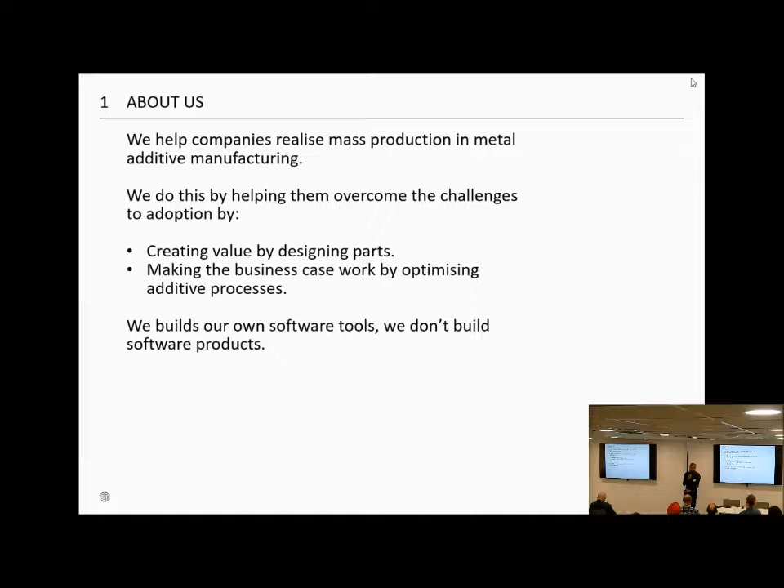So I've got a slide titled 'What is AM?' That's slightly confusing because obviously the talk is titled around 3D printing. 3D printing and all of the associated technologies have a real identity crisis problem, because 3D printing is actually a specific type of additive process - building something up through layers.

We heard about FDM as another type of process, but essentially this captures a whole range of different types of processes for lots of different materials, from plastics all the way to high-end metals. Additive manufacturing is an ASTM agreed term for those technologies entering into the industrial space, qualified because they provide mechanical properties similar to traditional manufacturing. This isn't just creating similar materials - we're actually printing in metals that we can use for all kinds of different applications.

What's really interesting about additive manufacturing fundamentally is that it consolidates processes. Traditionally when we think about how we make something, first we form the material - creating the metal or alloy we want. Then we have a secondary step where we actually create and form the object itself. This is almost how our engineering disciplines exist - you've got your physics, material science, and then your mechanical engineers.

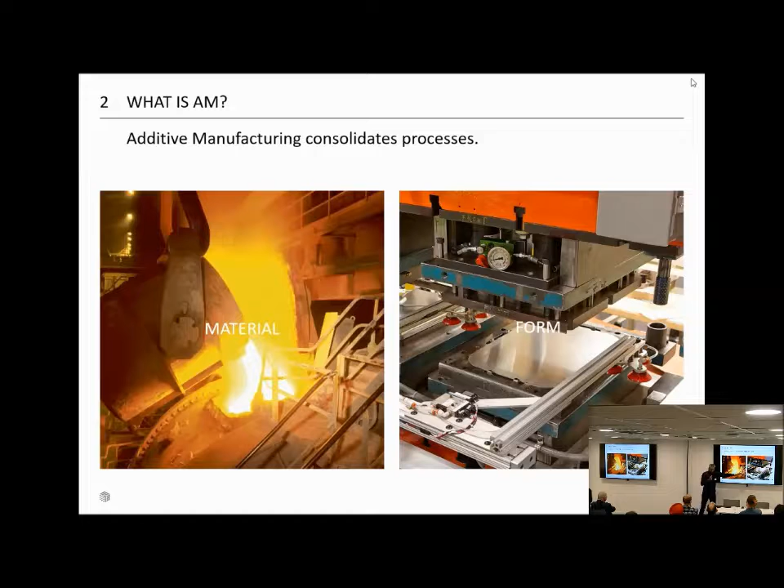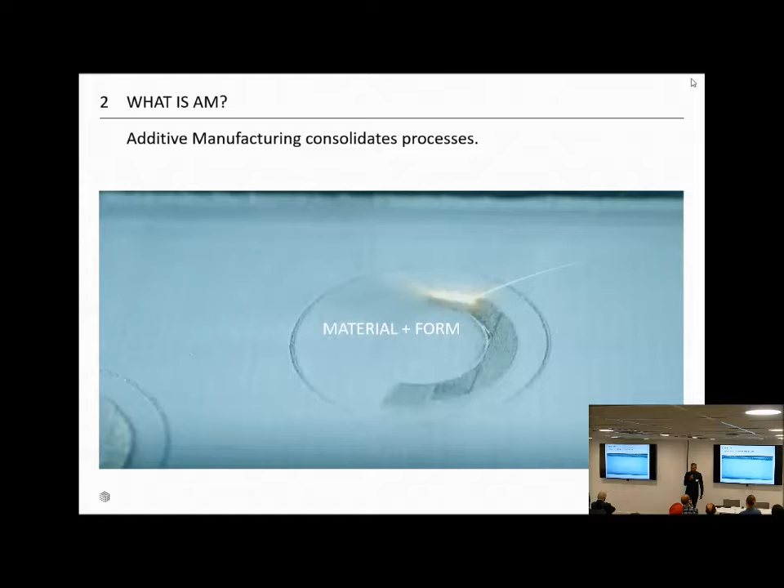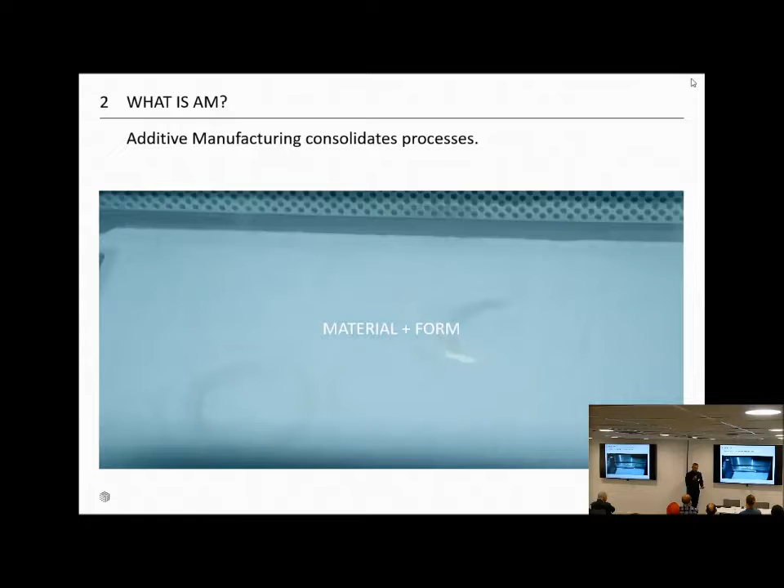So, some examples of parts. The reality is that actually there is a lot of manufacturing happening. It's not really publicly talked about because the main reason is we're talking about very, very high-end industries and markets, and this is usually driven predominantly by economics, in terms of cost.

So aerospace, and this includes both rocket nozzles, as we have here on the left, and also civil aerospace. We are building quite a lot of flight-ready parts on the space side, and there's also a lot of applications in civil aerospace. This is largely driven because in order to build these types of parts consistently, you would usually have to have multiple step processes: first take a billet, machine part of that out, then weld something on, etc. Each of the qualification issues that come across that challenge mean it becomes much easier to use a single step process like additive.

And it's also very similar, actually, in the medical space. This is an acetabular cup, which is part of a hip replacement. Companies like Stryker Orthopedics have produced probably at this point hundreds of thousands of these implants, and they are in use today. Here we have a tremendous opportunity to actually design this porous structure, and the way that structure interacts with the bone can actually be engineered and designed in order to promote bone growth. So there's huge amounts of really exciting opportunities in the medical space around that.

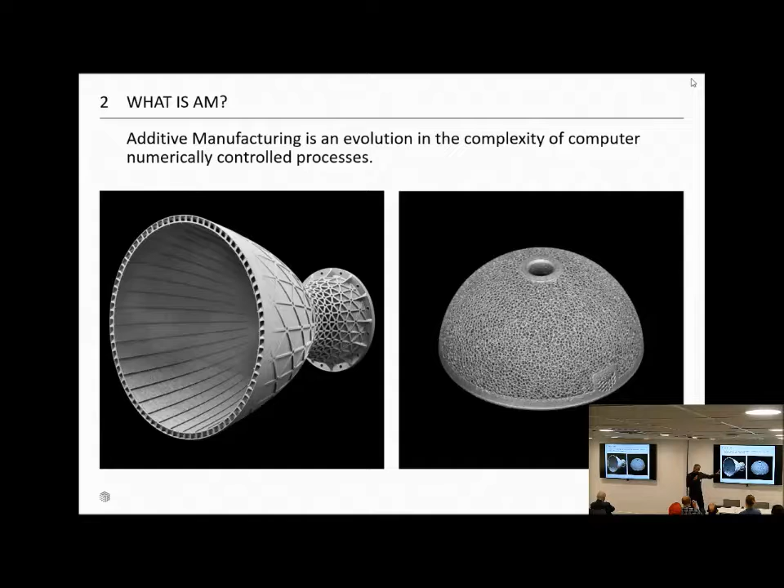But as you'll know from just looking at that, there's a lot there. There's a lot of structure, there's a lot of data. When we think about these systems, our machines are actually considerably smaller than the systems that Greg talked about. So this block on the left is about 250 by 250 in the XY, and then about 300 mil high. It contains in that model around about 20 million individual lattice elements, every single beam here, and we can push those down to the order of about 0.1 millimeters.

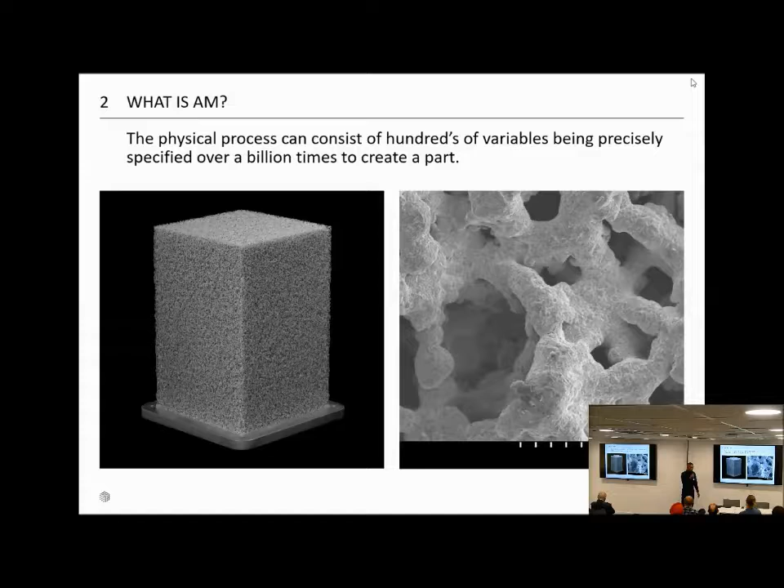So you can already start to understand the challenges from the standpoint of how do I build a geometric representation of this model? More importantly, how do I take that geometric representation from a digital plane and actually manufacture that data? How do I build computational tools to help me deal with the amount of data that we're pushing across? So there's actually this incredible richness in 3D printing and additive manufacturing for the application of really interesting algorithmic approaches to solving that, and that is part of what we do.

But you also need to incorporate a lot of understanding across a whole range of disciplines. There's still a lot of things that are unknown about the way the actual laser powder bed fusion process works, like what actually happens when a laser is fired and hits a bunch of powder, and how does it form that metal. Lawrence Livermore National Laboratory actually went ahead and looked at this with a high-speed camera, and it's definitely a really exciting video to watch as it blows away all of this metal powder as it's focused down on a microscopic level.

Watching the melt fusion interaction and condensation is an incredibly complex process. We're still at a very early stage in understanding that, but we have to bring some of that understanding into our design process in order to understand what works and what isn't going to work in terms of what actually allows you to build a good part.

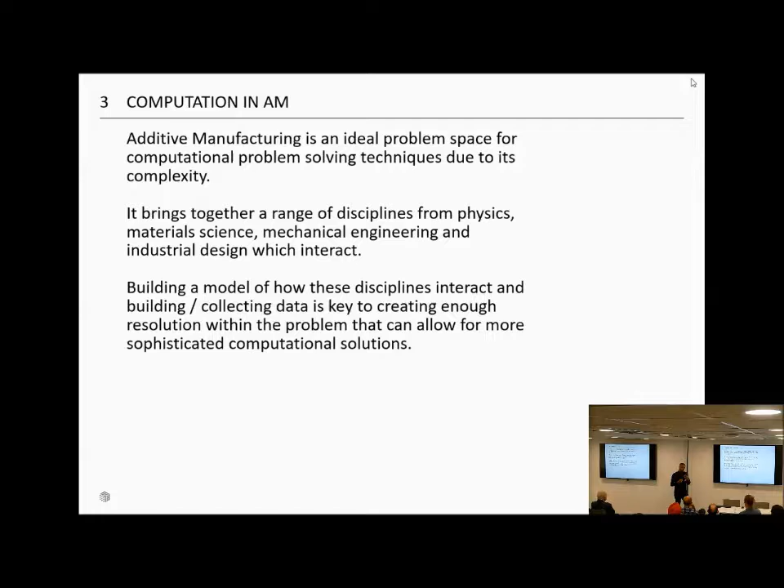So part of what we're doing at this point is, it's a bit too far ahead for us to start applying machine learning or AI to what we're doing. But what we are doing is building the environment for those algorithms. We're building a lot of models and data to help us create environments where we can start to bring more sophisticated algorithmic problem-solving solutions to that space.

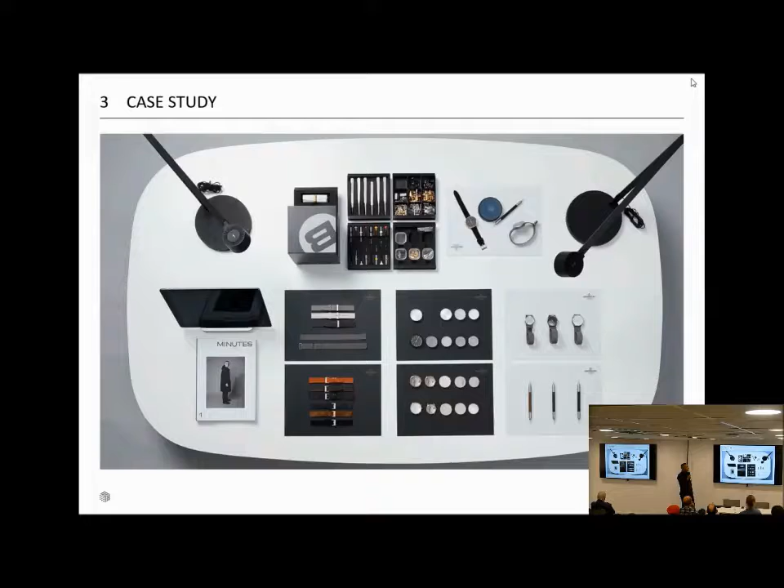I want to give you an example, a case study of a part which I can actually talk about, because 90% of the projects we work on are at a level where you can't get into any detail. But this project involves a couple of things we did with a company called Uniform Wares, a small watch manufacturer here in the UK, but a global retailer selling product across the world. We worked with them on developing a brand new material, and that material is actually in this watch, the watch strap itself.

Working very closely with them, we designed and manufactured a new type of fabric mesh, going through the process of trying to understand what the design potential of that could be, and how the computation side comes into that.

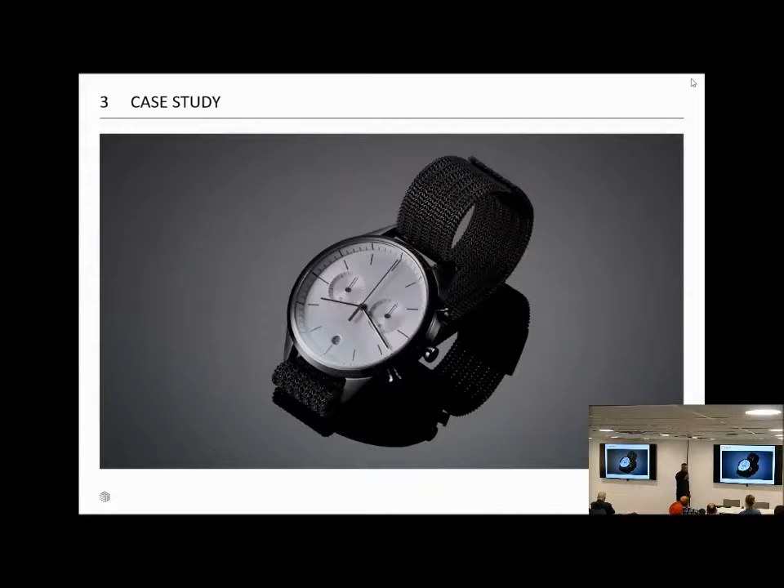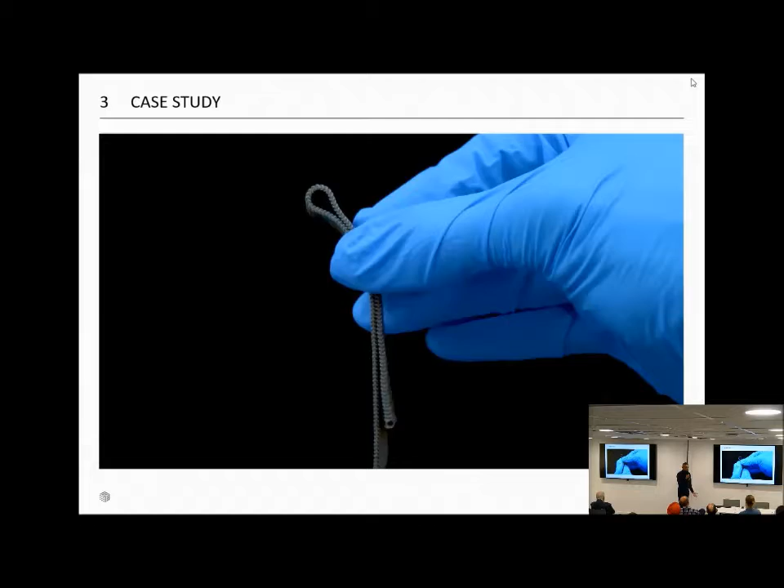One of the things we wanted to do was create a material with asymmetric behavior. As you can see, as I'm folding that fabric structure, I'm getting two completely different bend radiuses. You can start to see how this can have all kinds of different applications, from flexible hinges in consumer electronic devices to heart stents. But this is the kind of level of control we're trying to achieve here.

And to do that requires us to be able to model down into this part with a tremendous amount of detail. It's this kind of fidelity which is where the complexity really starts to lie.

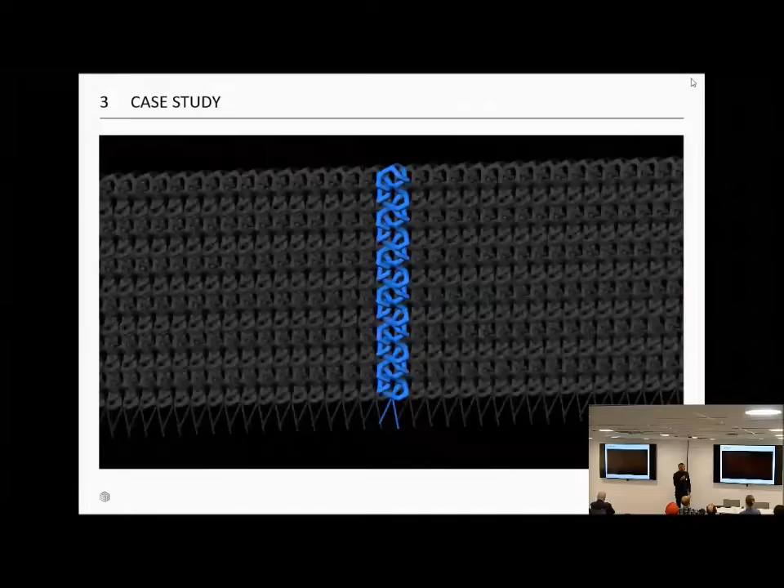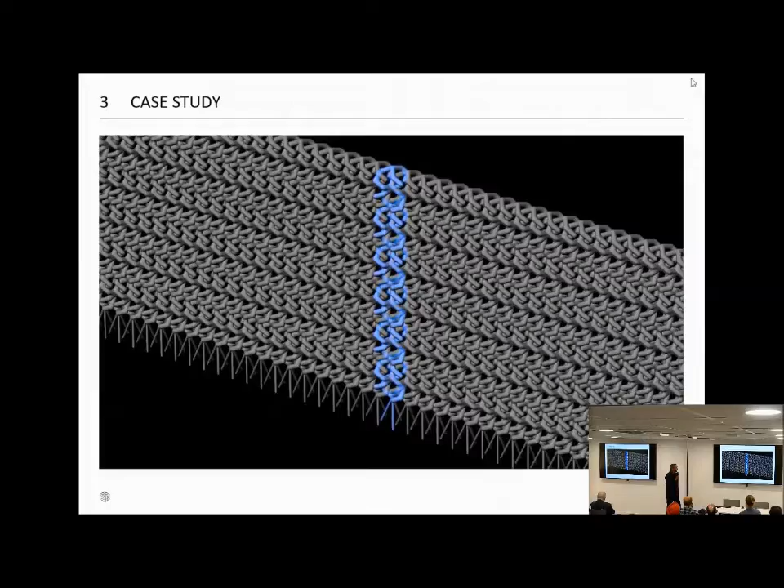In this actual weave itself, unlike normal mesh straps or fabric weaves, these parts are built so there is no weak link. It's a single link which is all intersectionally built. That allows us to provide a very high level of precision in controlling that behavior. Each individual strap contains something like 39,000 individual elements, and we need, from a CAD environment side, the ability to go in and modify every single individual strut.

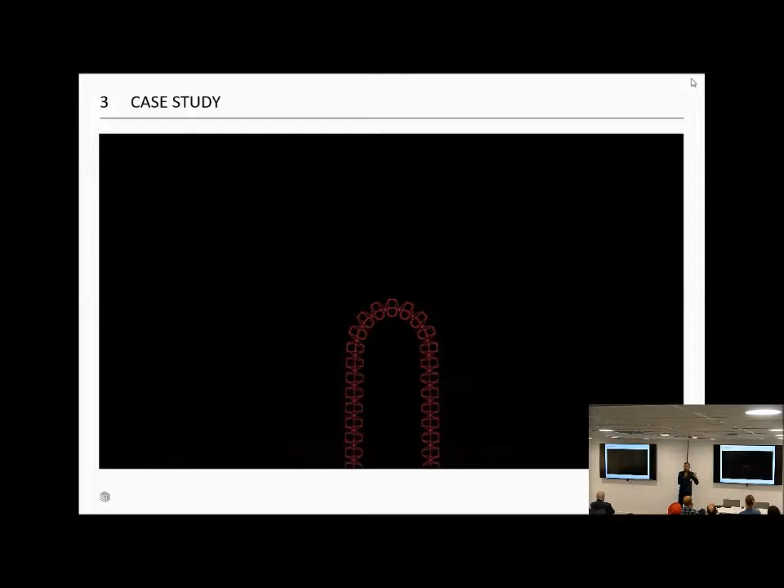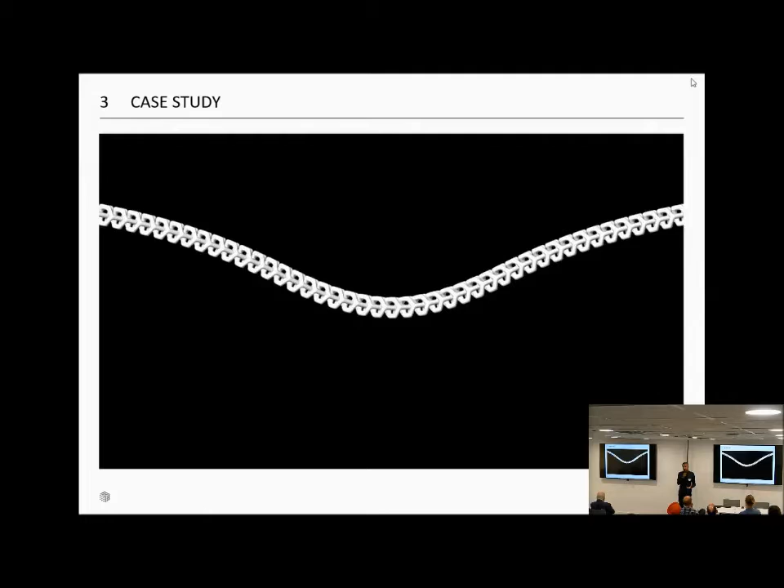Doing that allows us to simulate, for example, how the actual behavior of that structure is going to work. Just by moving a few links around about 50 microns, we start to have the ability to physically engineer exactly how we want that to behave in the real world. And this kind of level of control can then be exercised on an individual link level, which gives us a huge amount of customization, something you would never be able to do with a standard part.

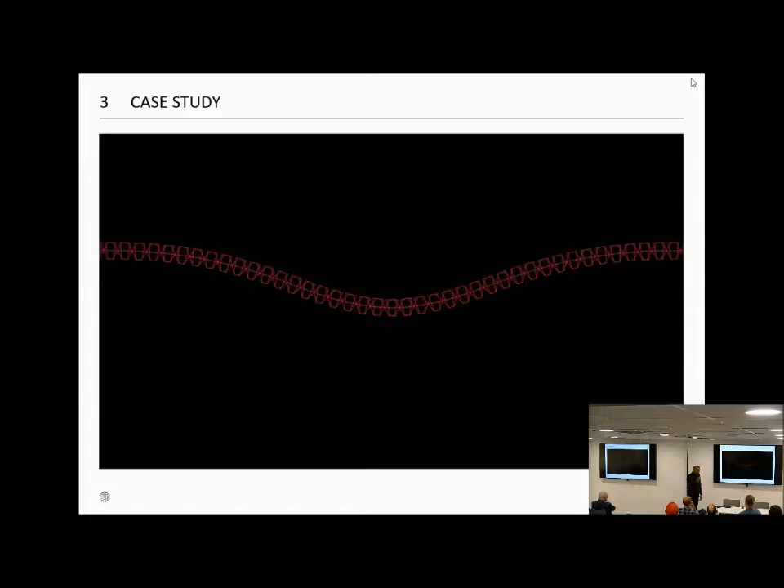Now, when I talk about the amount of detail we're dealing with in each of these parts, it's important to give you context for what I mean by those numbers. In the individual watch straps, and I have an example with me, there are 35 million laser operations per strap. In each operation, I have about 10 to 15 different variables I can control in order to control the way the actual melt pool and the physical process of fusion occurs. And I need to be able to control that.

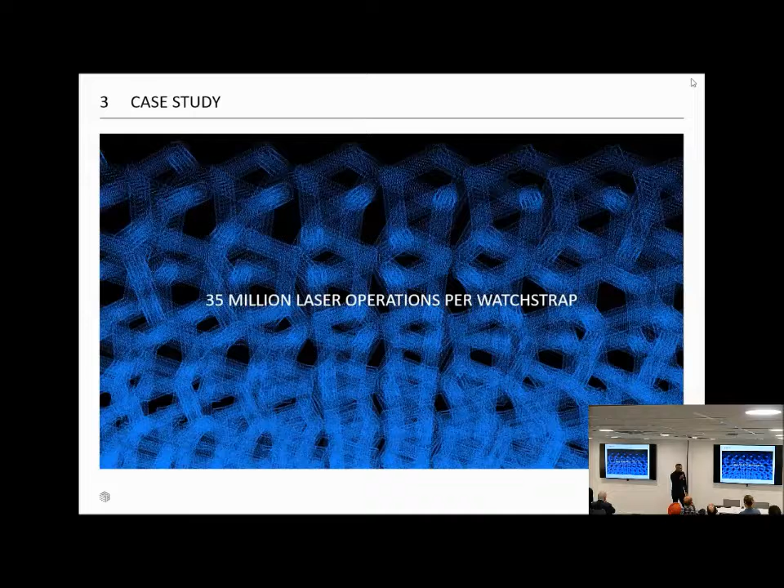At the moment, this is happening at around 10,000 laser operations per second. The laser is moving in increments of up to 20 microns, traveling at speeds of around 2 to 3 meters per second. And we need ways of being able to manage and control that data, and be able to individually go into each operation and manipulate it as required from a design standpoint.

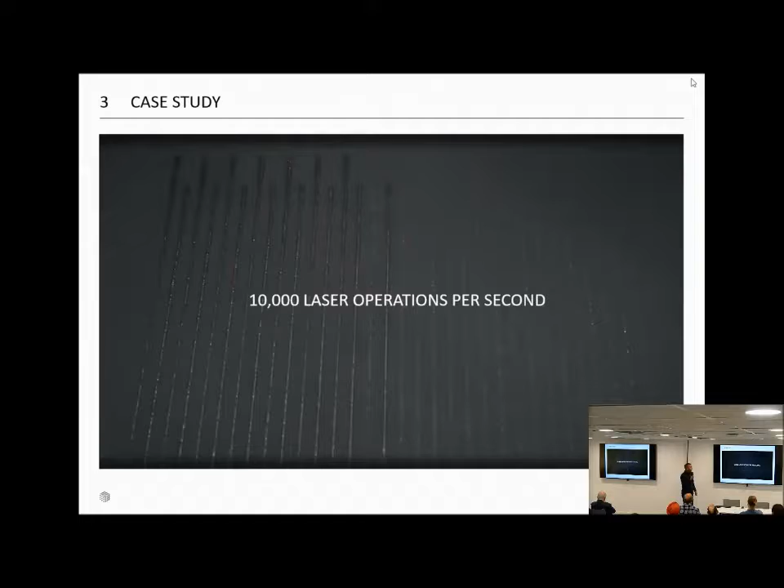So what we've done is built a lot of additional control and software levels of control in order to really be able to dig into that process and actually be able to manipulate and bring that level of opportunity to the table. And that is something I think which is a big component of where the future really sits with a lot of this technology.

We're seeing a huge amount of improvement in the systems themselves. Laser powder bed is probably the most predominant technology that exists today. It's industrially used by companies such as GE, as I mentioned before, Stryker Orthopedic, and a whole range of aerospace customers as well. But we are seeing a whole new generation of systems coming out, and with them comes improvements to material quality, surface quality, and also productivity in these systems.

What we're tending to find, and what's really interesting, is that computation has become this almost universal language for us. So when you're working with designers who are typically drawing on a sheet of paper, how do you bring computation as a language into something which can work as flexibly with their requirement to represent something, but then can also be transformed into something with a huge amount of high level of specificity.

And then being able to move between that translation of data. How do you manage that data? These are all really complex and interesting questions, because we're not moving from someone providing a drawing to a shop, which then machines it, and then someone polishes that at the end. There's actually traceability in that data and how it's managed, and it really does have a really interesting position in also fundamentally changing not just physical manufacturing, but changing all of the engineering disciplines as a fundamental aspect of it.

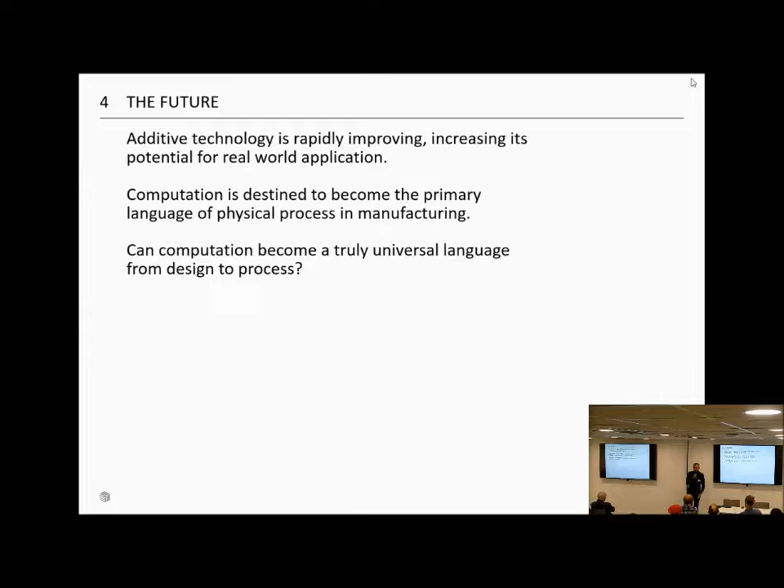And that is my short talk. Thank you.